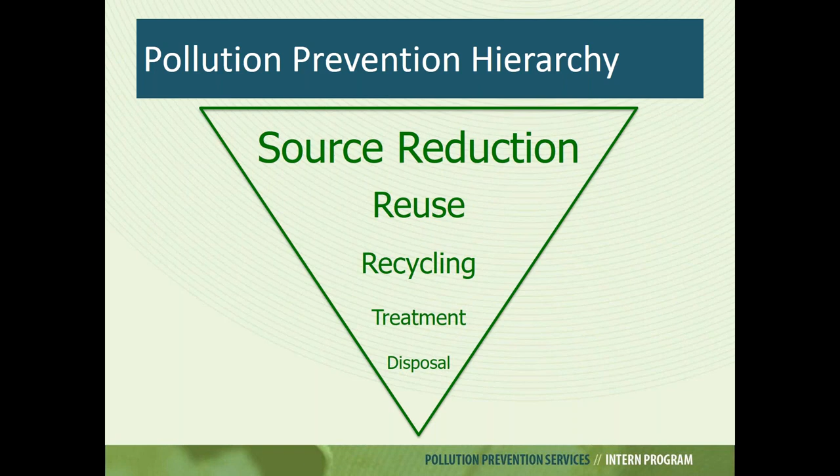We want to reduce it at the source instead of trying to treat or dispose it at the end of the process. So in the case of steam, which is our topic of the day, our goal is to conserve water, energy, and possibly pre-treatment chemicals that are used to generate the steam. So Pollution Prevention Services provides technical assistance to businesses and industries in Iowa with two goals, as we mentioned earlier: to improve environmental performance at their facility by applying the P2 principles, and to save them money.

A couple things that I want to note: because we are housed in a regulatory agency, the Iowa Code protects the proprietary information of the companies that we assist. So today's webinar, we're focusing on the beneficial use of the interns in addressing steam and boiler efficiency projects. Any company information that you see shared today has been taken from case summaries, and that's all been pre-approved by the host companies for us to share publicly.

So we'll do our best to answer questions, but please understand there may be some of the questions that we can't go into detail with because we are limited on that. And I don't know if it's going to affect today's project, but also our interns are not trained to assess regulatory compliance issues. But it is helpful to know that sometimes the recommendations that the interns have can be limited by regulatory issues that the companies are under. So that could or could not affect the recommendations sometimes.

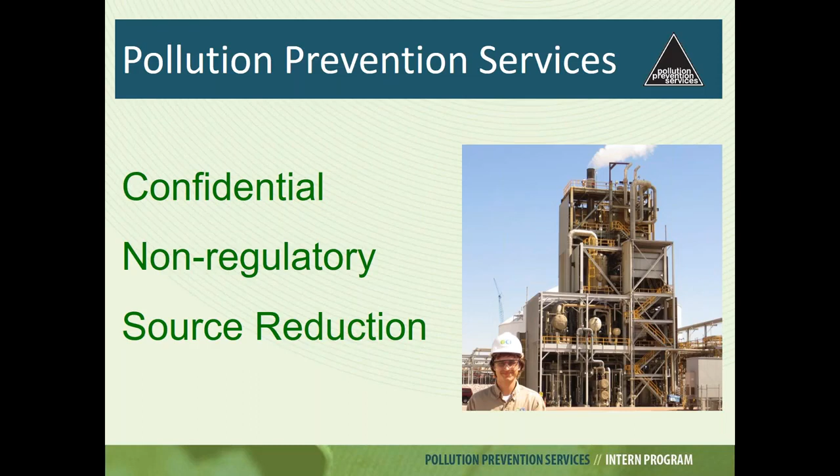So I used the 2018 class because two of the projects that we're highlighting today were done in 2018, and then the other one was actually produced in our case summary book of that year. But in the summer, our program ramps up our technical team with upper level engineering students to work on site with the host companies. So these interns, they spend their first week in a rigorous training session.

They learn how to conduct assessments, how to do the data collection and documentation. And then they spend the remainder of their internship at their assigned company doing the project. They're going to collect in-depth data so that the companies can act on that. So today, as we mentioned, we're going to highlight a couple of steam reduction and boiler efficiency projects that these students did.

So again, the interns help us meet our goals by conducting in-depth data collection and research. Our goal is to get the depth of information so that companies can make informed decisions regarding implementation and their environmental performance strategies.

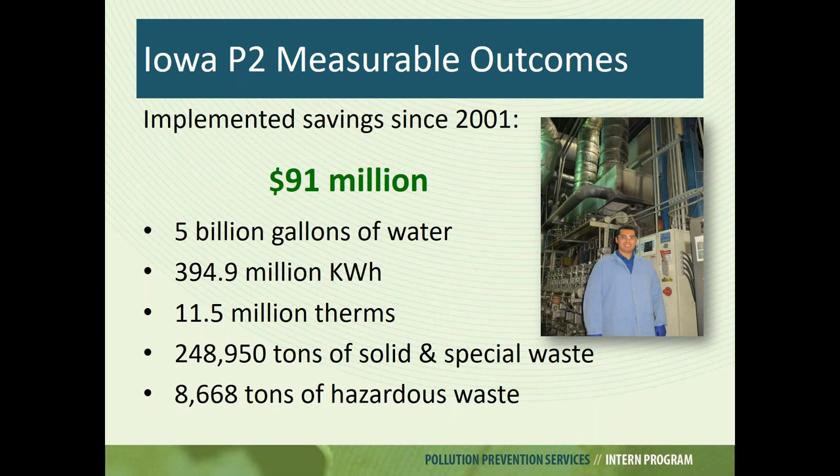Thank you, Danielle. So Andrew is a mechanical engineering student at Iowa State University, and as you can see, he completed his internship in 2018 at Cambrex in Charles City, Iowa. The basis of Andrew's project was to complete a survey of the steam and condensate return systems and make recommendations to improve the efficiency of the system and reduce associated costs.

So we're going to start out by showing how a steam trap works. So basically, steam traps are a type of automatic valve that filters out condensate or condensed steam and non-condensable gases, basically air, without letting steam escape. In industry, steam is used regularly for heating or for mechanical power. There are different types of steam traps, but their purpose is the same, and that is to ensure that steam is not wasted.

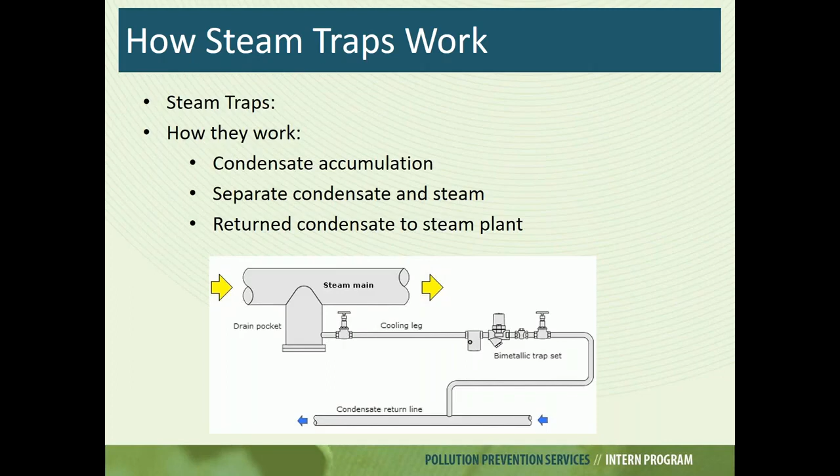An ultrasonic leak detector allows you to hear the trap opening and closing as it works. You can hear if a trap is not working or if it is not functioning at full capacity. A trap that is failed open provides a continuous signal, and a trap failed closed produces no signal on the ultrasonic leak detector.

At Cambrex, the intern used an ultrasonic leak detector to identify inefficiencies in the steam system, including leaks and the status of the traps. In general, interns who focus on steam projects haven't worked on a steam system, and for many of them, this is the first time they are in an industrial facility. Not only do they have to learn the processes contained within the facility, but they have to learn how specific components work and interact within those processes.

Spending a bit of time practicing with the equipment and learning how to apply it to the system helps them identify when something is amiss. One of the challenges that Andrew shared with us was that due to some facilities having different pressures of steam, when using the ULD, it can sound different between a higher pressure and a lower pressure. Knowing the differences can take practice to know what to listen for and accurately denoting if the trap is just leaking or if it is completely failed.

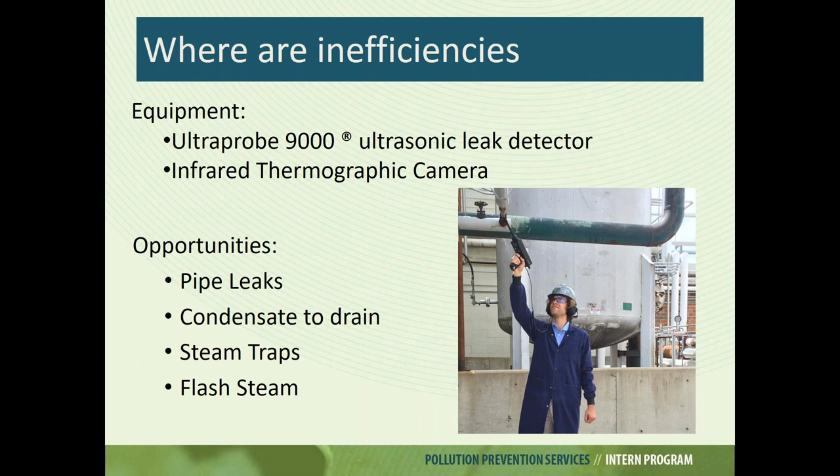Another common issue is knowing if the trap is in service and blocked or if it is failed closed. If a trap is blocked, it can be unblocked without having to change out the trap, but if it is failed closed, the trap will have to be replaced completely. Knowing the difference can save money on buying steam traps and can usually be detected with an infrared camera or a non-contact thermometer.

By fixing or replacing these failed traps, a facility can see significant water and natural gas savings, as well as cost savings. To calculate the baseline of the steam system, Andrew first had to determine the loss of the steam and condensate from the faulty steam trap, as well as the utility expenses for water and natural gas. Using these values, he was able to calculate the cost of steam by using the amount of energy it takes to heat the water to steam.

Steam traps were attached to various size pipes, so knowing the pressure at each application is critical to calculate losses for each specific trap. Culminating all of the losses, the potential savings can be calculated for fixing the current failed and leaking traps, as well as the savings from an ongoing maintenance program.

Overall, the ULD has proven helpful to interns to identify and quantify leaking or failed traps. As long as you know the type of trap you are analyzing and what it sounds like when it is operational versus not operational, the ULD is a great tool to assist with a steam system analysis.

On the screen, you can see some of the savings and recommendations that Andrew had presented. And so these are the potential and projected water and natural gas savings and chemical savings that he produced from doing his steam system audit.

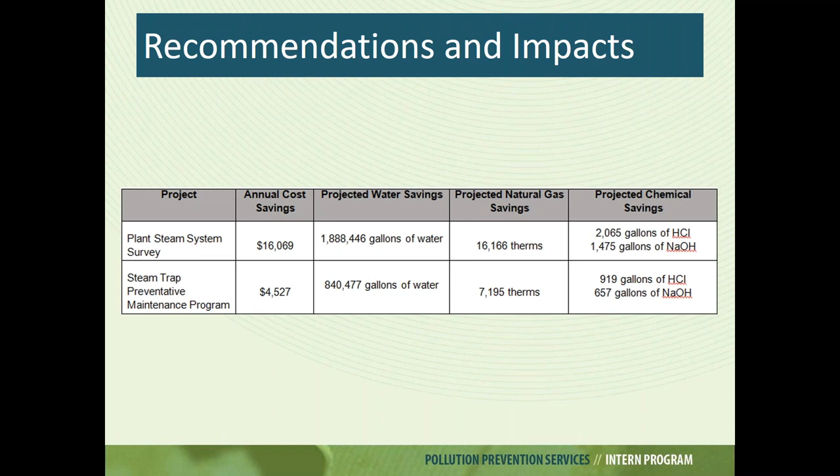All right. So, hi. My name is Badrinath. I have a master's in mechanical engineering, and I was a 2018 P2 intern at JBS, where the main project objective was basically to reduce steam usage, and also put a PM plan in place for steam traps in the facility.

I had to conduct an assessment of the steam system and improve the efficiency by reducing the steam demand, and also develop an implementation and ongoing maintenance plan to maintain the efficiency of the system. Now the main challenge in a facility like JBS is that it's a really, really big facility, and it's also a really old facility, which means that the steam system there is also really old. For instance, JBS has about 300 to 400 traps in the facility itself.

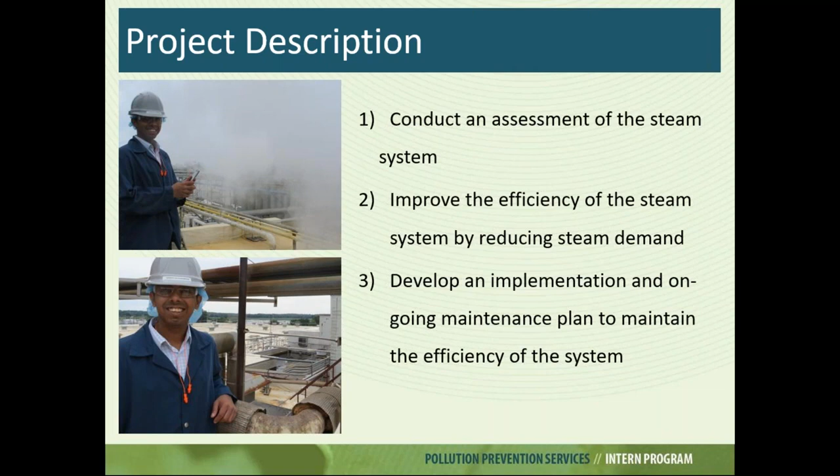So if you save steam, you will save a lot of other things as well, in addition to money. And especially in really huge old facilities that have a steam heating system, I think having a preventive maintenance plan in place and being really vigilant about steam usage is really important, from an environmental perspective as well as a financial perspective for the organization. Moving on.

So in my project, I am going to talk about two of the projects that I did. One was a steam leak detection survey, where I went around the facility using an UltraProbe 9000 ultrasonic leak detector to detect steam leaks throughout the plant, and it was really useful, especially in a facility as big as JBS. The ULD was a big help, because it's really easy to use, and it's also fun to use.

And so I basically used the ULD to detect steam leaks in the plant. I went around the plant, and I used the ULD to adjust sensitivity and everything. As you might be aware, the ULD has different sensitivity settings.

You start off with the coarse setting, and then you move to the finer setting once you get closer to the source of the steam leak. That helps you actually hone in and find the leak and actually store information regarding it. So that's really helpful, because a lot of steam leaks aren't really visible. Of course, you have some leaks that are very visible, like some steam pipes that are blown off, and you don't really need the ULD to detect that.

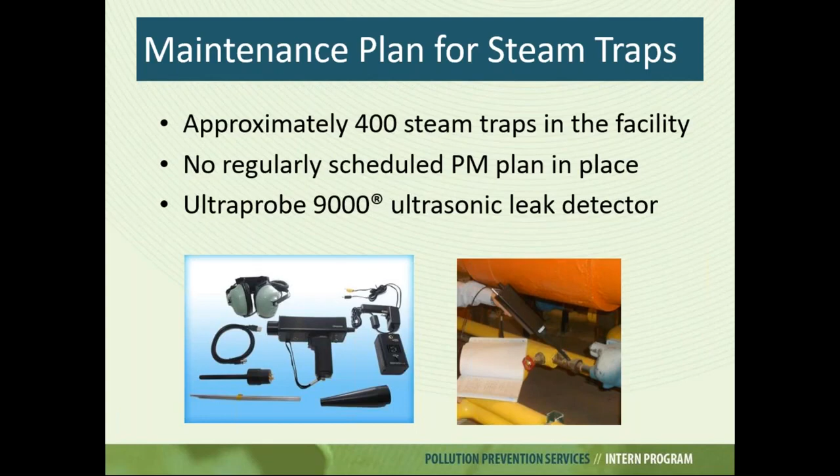So my two projects: the steam leak repair project led to an annual cost savings of about $11,000, a projected water savings of about 160,000 gallons, and natural gas savings of about 27,000 therms. And the steam trap PM program that I recommended will lead to an annual cost savings of approximately $76,000, a projected water savings of about 1.4 million gallons, and a projected natural gas savings of about 210,000 therms.

Now, it's also important to note that this was just a piece of the pie in terms of steam usage and steam savings, because I approached the project, which was to increase the efficiency of the system by reducing steam demand, from a three-pronged standpoint. The first prong being detect steam leaks and repair them immediately. The second prong being recommend a PM plan for the steam traps in the facility, because there is no current PM plan in place. And the third was a process-based approach.

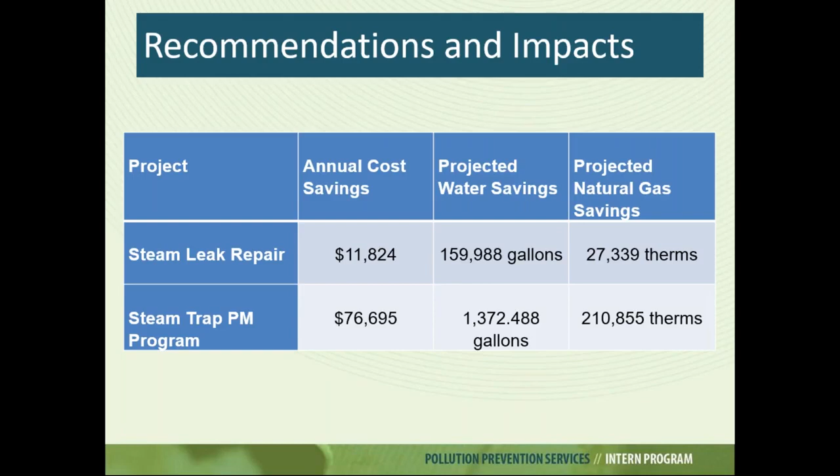So yeah, that is all I have. Awesome. Cool. All right. So I'm going to send the presentation back over to you, Danielle and Sarah. And there you go. You see us?

Yes. So the last project that we want to highlight was done at a state facility. Ethan Moran was a mechanical engineering student, again at Iowa State University. This project was at a 100-year-old facility operated by the Iowa Department of Human Services.

The main purpose of the facility is to provide services as a licensed intermediate residential care facility for intellectually disabled individuals. Their mission is to prepare and support individuals so that they can live in a community of their choice. They've got both residential and day facilities, but approximately 130 individuals live on campus, supported by about 500 employees in the intermediate care facility.

They also have a juvenile treatment facility on site, called the Woodward Academy, which leases building space on the campus. The Woodward Academy provides education and clinical services in a residential setting for approximately 265 students, and it is operated 24 hours a day, 365 days a year.

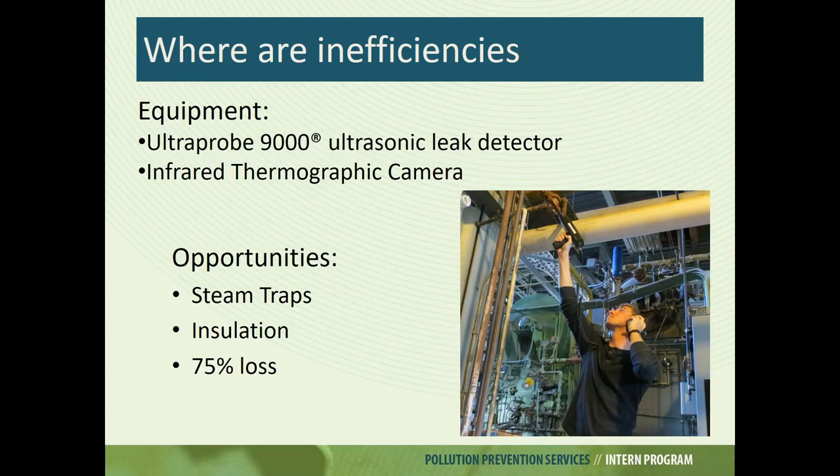And so you can see by correcting the amount of potential there is, or the amount of loss that can be had in a system that's not operating efficiently. But leaks in the steam system can also add demand to the boiler, and they create pressure drops in the system, so it leads to an insufficient supply where it's needed.

Cost savings and other benefits of a regular maintenance plan. An efficiently operating steam system will go far beyond eliminating steam leaks and noises in your steam system. Almost every project that we do for steam leaks, steam traps, and compressed air includes a component for ongoing maintenance, because you can correct them, but they continue to go bad, and you need to stay on top of that in order to keep your system working efficiently.

There's a statistic in a US Department of Energy publication that states approximately 20% of steam can be lost to leaking traps in a typical distribution system that does not have an ongoing preventative maintenance program. So once we get these steam systems operating efficiently for the companies, hopefully they can stay on top of them. And that's the number that we typically use for calculating the maintenance program savings, unless they have documentation that shows it's different.

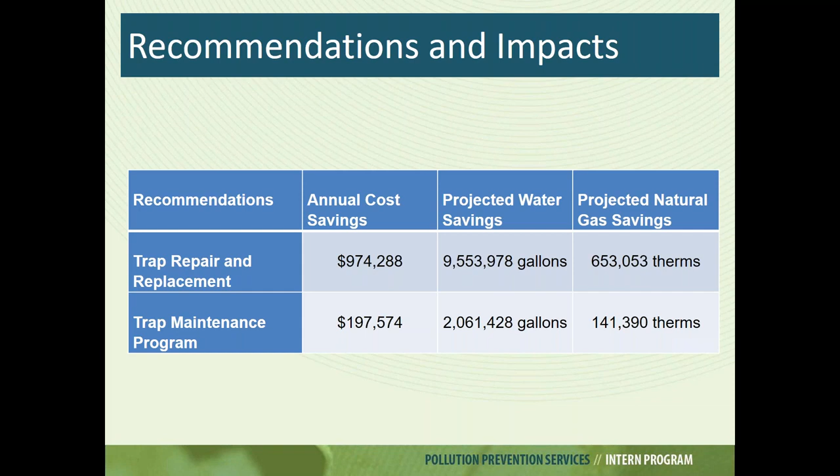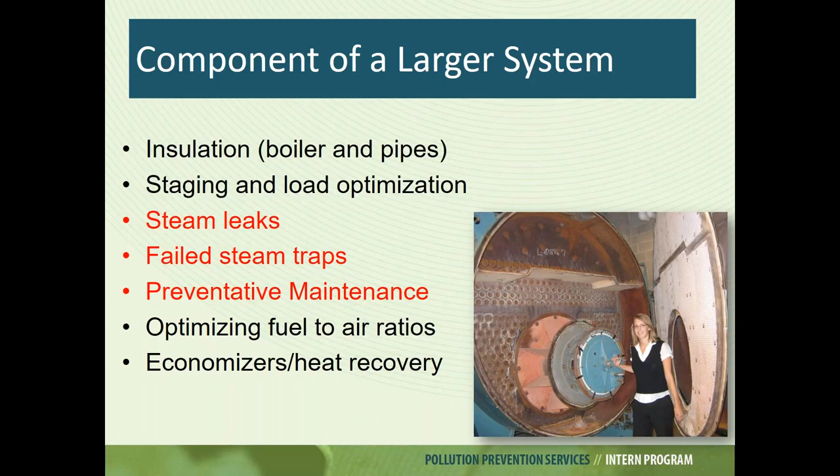But another thing to keep in mind is that the steam distribution system is part of a larger overall system. It's just one of the parts that you have to keep operating, but any one of these can affect the others. An inefficient steam distribution system is going to affect the amount of steam that you have to generate and the efficiency of the rest of the system. So this is the place that we recommend that our interns start with their systems. So that's what we have for you.

Have any questions come in, Maureen? Yeah, actually, someone was asking again how many steam traps were at the site you were just talking about, and how many of them needed repairs after the inspections were done? I don't have the number of traps right in front of me, but I believe there was over 1,000 traps. Ooh, a lot. Okay, no problem.

The steam lines themselves, there's 475,000 feet of steam lines. It's all distributed in a steam tunnel, and the tunnels themselves were 8,000 foot long, so there was a lot. This project concluded in the fall of 2017. They did it in stages, and all of the traps that needed to be purchased were purchased early this spring, and they were in the final stages of implementation. I couldn't get a hold of the site supervisor, but I believe it was scheduled to finish up either 1st of September or 1st of October before the cold season.